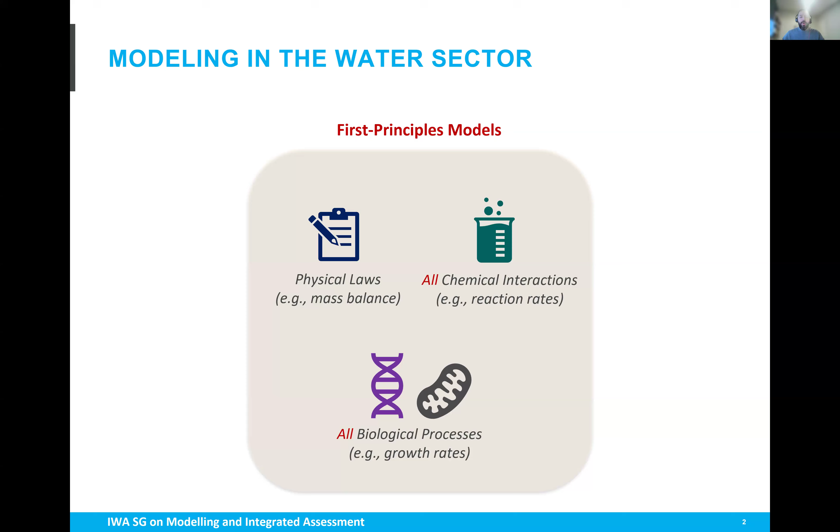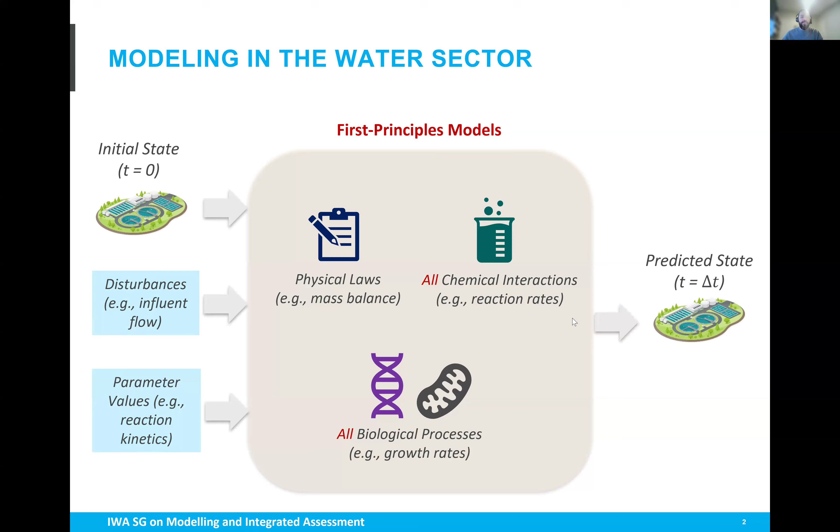That model takes the initial state of the system, the disturbances that affect the system, like the influent flow if we're talking about a treatment plant, and the parameter values, like the reaction kinetics, and gives us the predicted system state at another time. That's how we used to do modeling, we're still doing it, and likely we will continue doing it.

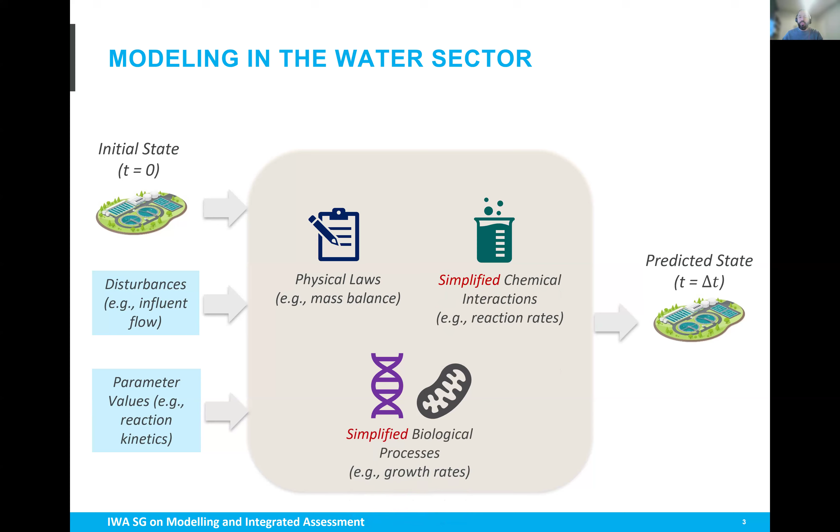A little tweak on that is when we try to simplify these processes. We don't throw in everything we know about the system; chemical reactions and biological processes are lumped or simplified. Now we're talking about semi-empirical models, and an example is a mechanistic model such as the ASM models in wastewater that almost every wastewater engineer is using, maybe on a daily basis.

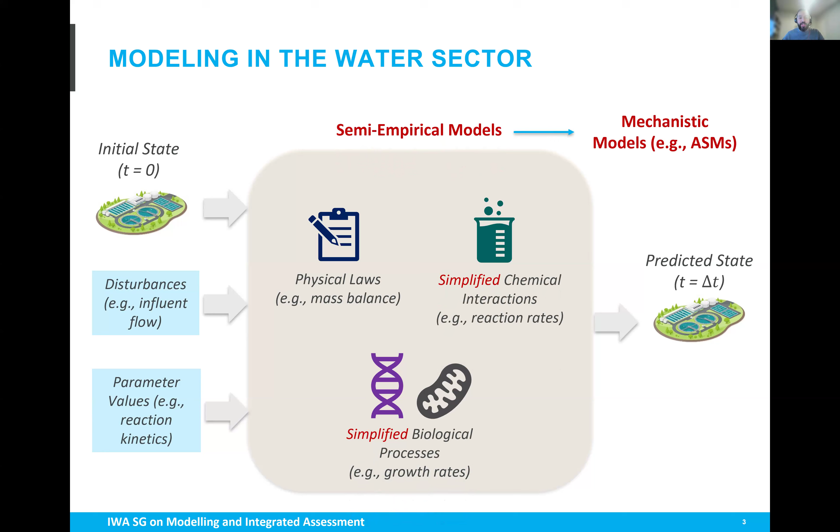These mechanistic models have been the gold standard in our field. They try to model a cause and effect relationship, so that's why we love working with them, because they match our causal mind. We prefer causal relationships over statistical relationships because they allow us to answer what-if or hypothetical questions, or make an intervention, seeing the actual case of the plant or the system.

But what if we changed that factor? What's going to happen in the system? Because these models are mainly based on causal relationships, they allow us to do so with reasonable confidence. That means they also work outside of the calibration range. Conceptually, you could extrapolate these models.

You may have less confidence because you didn't calibrate the parameters in another operational range, but you still have conceptual confidence because you're modeling the same relationship. So you likely know the trend might be right, and that when you extrapolate, things will work out. But this confidence is conditional because it assumes that you understand all the relationships in the system.

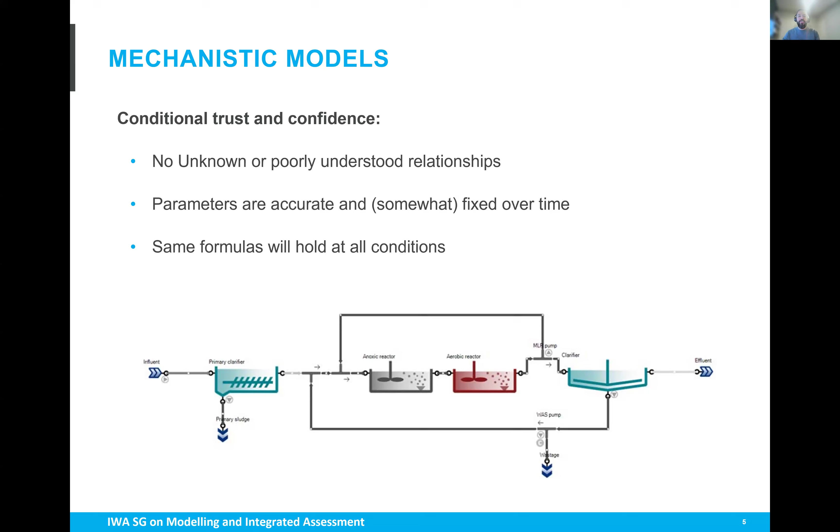You don't think that the Monod equation, for example, will change, or that another term should be added. And the modeling software and versions are being improved day by day by adding switch functions and inhibition functions that activate at certain conditions to make sure the same formula will hold all the time.

But actually, when you try to think, why do we build these models? Sometimes we may face some challenges. Do the mechanistic models fit everything that we need to do? So look at things from a bigger systems-thinking perspective.

You're going to see that we have some inputs which are a function of time, a system state, which is a result of the input and also a function of time, and the same for the output. So if you think about the inputs at time t, which is the present, and you'd like to model the input and understand more about it, that's kind of an influent generation problem. If you'd like to understand more about the system state, that turns into a monitoring and understanding problem. And if you would like to model the output or predict the output, that could help you in planning and decision support.

But if you think about the future, if you want to understand how things go in the future, sorry. So when you think about the future, if you would like to forecast the inputs, that will help you do some resource planning. For example, if you can forecast what influent is being generated in the next few days, that will allow you to do some resource planning. For example, shut down some reactors, or maybe you need some extra operators working on site.

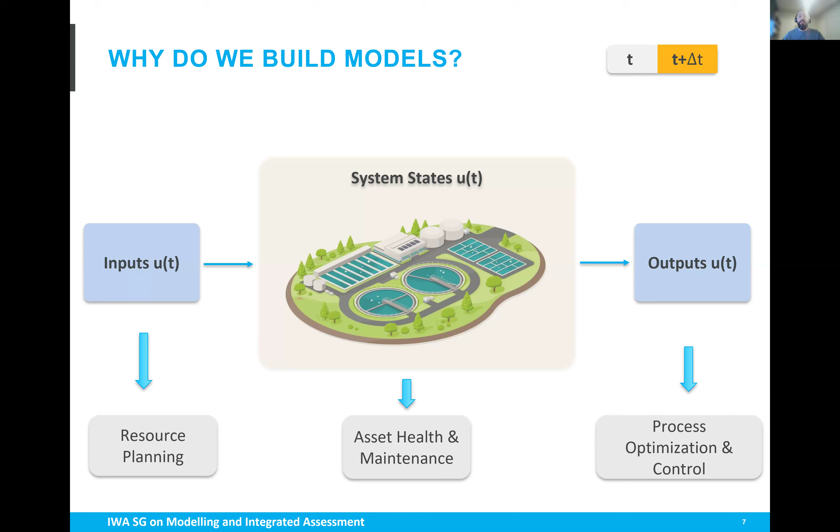And the same for the system state. If you can forecast what's going to happen to the system state, given the changes that you expect in the input, that will allow you to do some asset health and maintenance. And for the outputs, that will allow you to do some process optimization and control. So things don't fall in the same box with one model, as if you only want to do monitoring and understanding of a system and have only a single objective. There are different evolving objectives, and probably not the same type of model will work for everything.

So thinking about these objectives and putting them into boxes, we have process monitoring and understanding, asset health and maintenance, forecasting, process optimization and control, and planning and decision support. But not every part of this can be done using the same type of models. For example, can you do forecasting using the same mechanistic models? Well, there are some trials to do forecasting using them, but they require a massive amount of data, and they are not giving the results that everyone aims for.

But if we think about things the other way, with the huge amount of data being generated every day and the evolving computational power, now everyone is talking about artificial intelligence, but how do we benefit from that in our field, the water sector? A little introduction about what artificial intelligence is and what machine learning is. Artificial intelligence is mimicking how humans do intelligent tasks. Humans, for example, can talk and understand language. So now we have natural language processing and capabilities such as ChatGPT, which everyone is interacting with maybe on a daily basis right now.

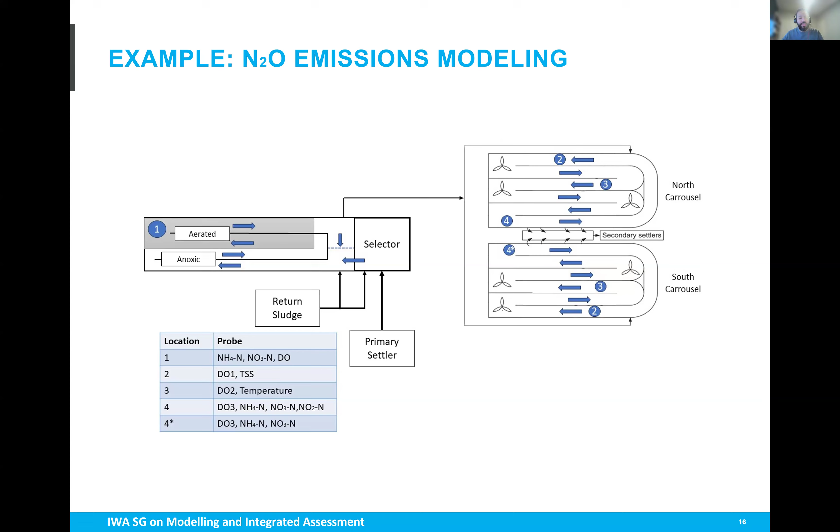So I will talk about two examples here. The first one is about N2O emissions modeling, and you can see more details in the publication that I'm going to share. That was a system where we were trying to model N2O emissions. For your background, mechanistic models have always struggled to capture or predict N2O emissions accurately. I will not talk further about the details, I've talked about it in several other conferences, but it's simply these input features being used in a machine learning model to predict the N2O emissions. And the results were already good in terms of prediction.

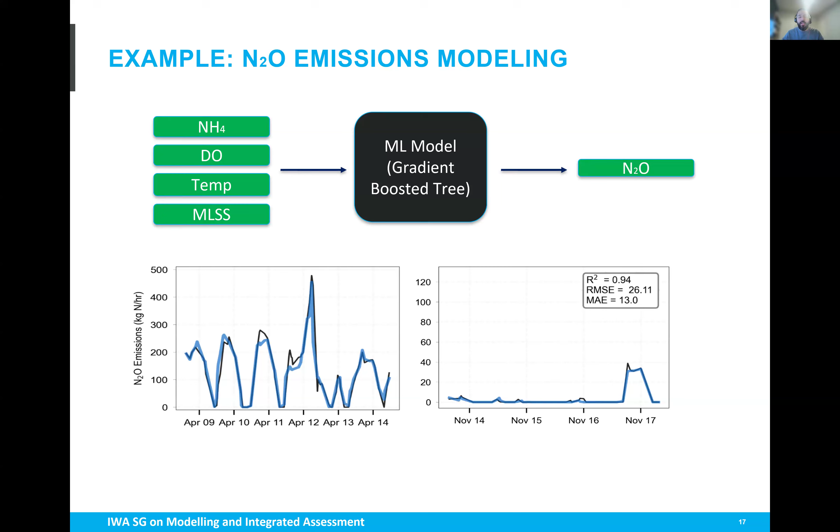So the message I would like to convey is that with data-driven models, you probably don't have to worry about accuracy anymore. With this powerful function approximator, with reasonable effort and reasonable data quality, you can generate whatever accuracy you're aiming for, probably. But there are other challenges to worry about. So, do we align with domain knowledge? Assuming that we already made the prediction, can we use these predictions for decision making?

Okay, now we see the prediction, we see what factors have made this N2O high. Can we rely on the model to go and modify one of these variables, one of these parameters, to reduce the N2O emissions or not?

But before we go that way, is the prediction aligned with domain knowledge? Because a model can be doing the right prediction, but for the wrong reason. Remember, you just trained this model on only one data set. So it could be just making some spurious relationships or spurious correlations.

So what we did here is that we tried to see the alignment of the model with the domain knowledge by trying to mimic and model the relationship between, for example, one parameter like the nitrite and the predicted variable. And we have two versions. One is a complex model and one is a simplified one.

And we found that for the complex model, the relationship was really shaky. When you increase the nitrite even by a very small amount, you could go from an increasing value of N2O to suddenly dropping or decreasing, and it's not a stable relationship.

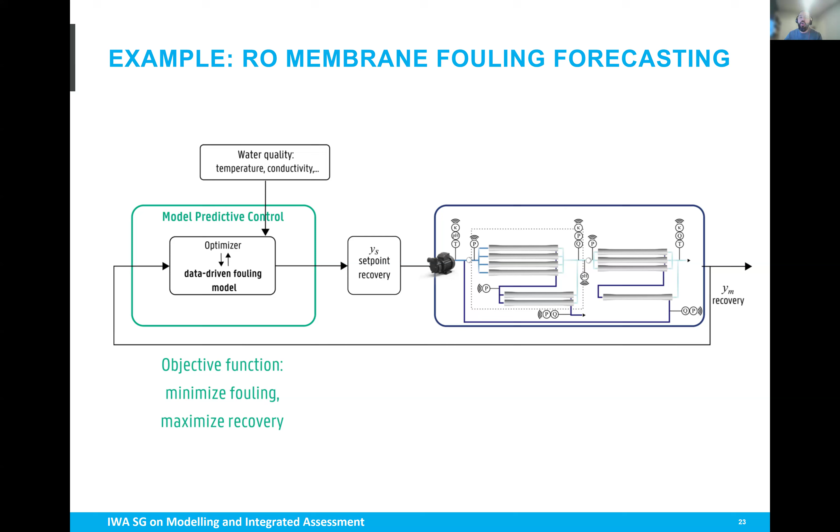Another quick example is about RO membrane fouling forecasting, and that work was done with modelEAU. The idea here was using data-driven modeling to predict or forecast the fouling of an RO membrane so that it's used as part of an MPC. Because mechanistic models that try to forecast membrane fouling are really heavy or not reliable to really make the forecasting or the prediction that you want.

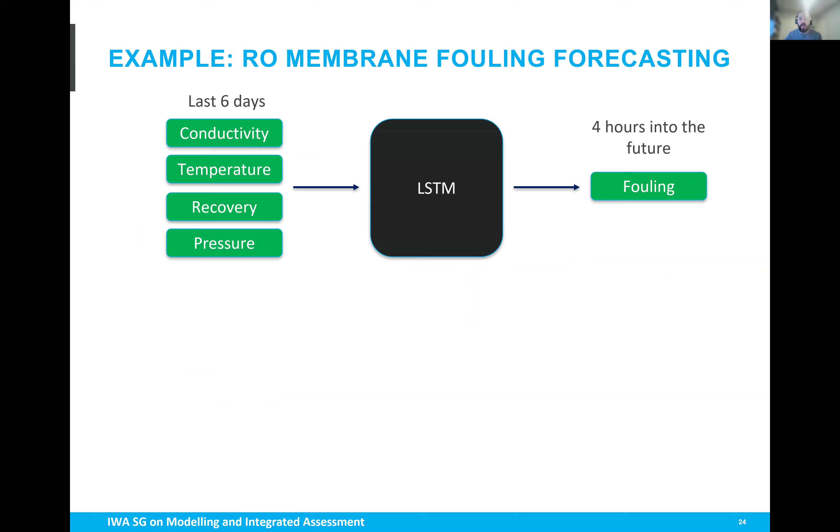And then same here, an LSTM model was used. It takes the last 6 days of these parameters and it tries to predict the fouling 4 hours into the future. And then if you look at this forecasting, it really looks good. This is almost how we try to evaluate our machine learning model in addition to metrics. You see that the forecasting looks really good.

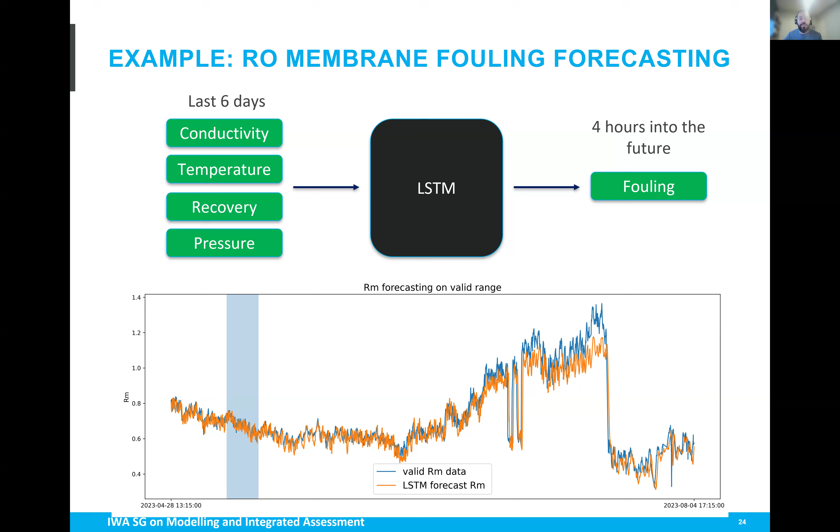But if you try to zoom on a period, even like this period that looks really good, you're going to see that you're actually missing the point of what you want to do. You would like to be able to forecast the trend or make an actual decision, because of how the fouling is going to change in the next few hours. But what's happening here is that there is a huge lag, maybe in terms of hours, between the actual forecasting and the actual data, which is giving you completely the wrong trend.

The reason for this is that the system is being turned off and on very frequently, and the data is very hard to interpret. It's very hard to find some meaningful relationship using the sensors when it's being turned off every few hours or maybe every 2 hours. So that was a problem. And if you really got into the illusion that it's just about some simple accuracy metrics, you will likely miss the purpose of why you're developing this model.

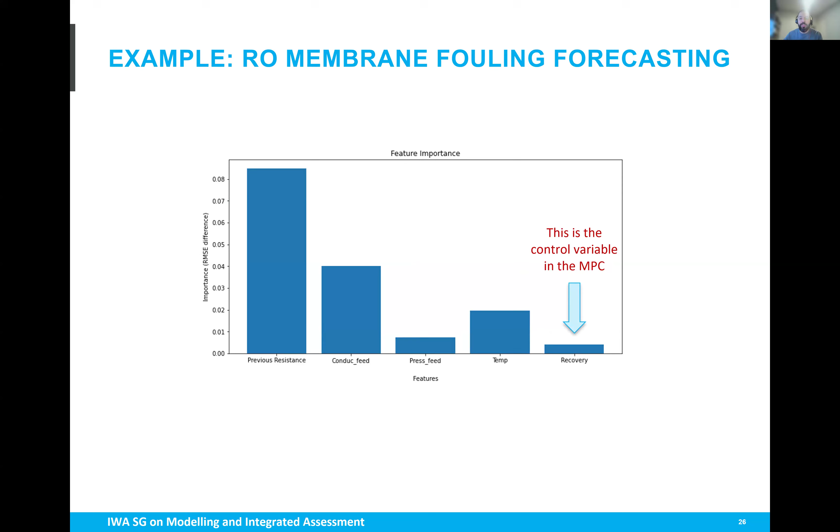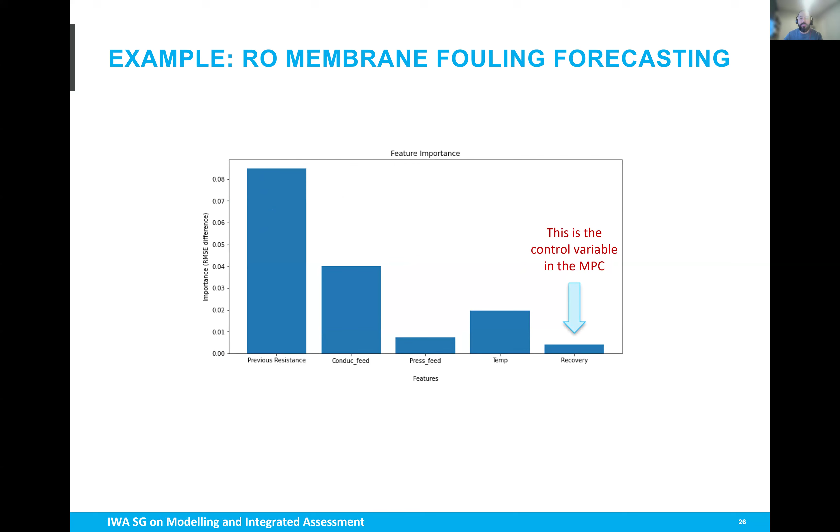And even further, that model should be reacting to recovery. But the model relies on spurious relationships. That's the feature importance of the features impacting the model, and the recovery is the one that is going to be used in an MPC setting. But you see that the model is relying on the previous resistance, which is the autoregressive relationship, instead of this recovery. And the way that was fixed is by reconstructing the membrane fouling, by predicting the difference, the delta RM, instead of RM.

And predicting that delta RM made the model able to capture the dynamics to a really great and better extent. That's because it turned the data into stationary data instead of highly non-stationary. It simplifies the problem even for a powerful machine learning model to solve. And that was reconstructed back, so you end up forecasting the absolute value of the membrane fouling.

So it is worth noting that even for a powerful model, the operational conditions and characteristics affect how the model works. They made the predictions lagged, and switching to forecasting the delta RM made the problem a lot simpler and easier to forecast, and led to better accuracy overall.

Some key takeaways about data-driven modeling: it's now part of our modeling toolbox. So don't think about this as replacing any of the other models; they solve certain types of problems. The other one is that just because they are very powerful doesn't mean you could just throw things in and get the output as a magical device.

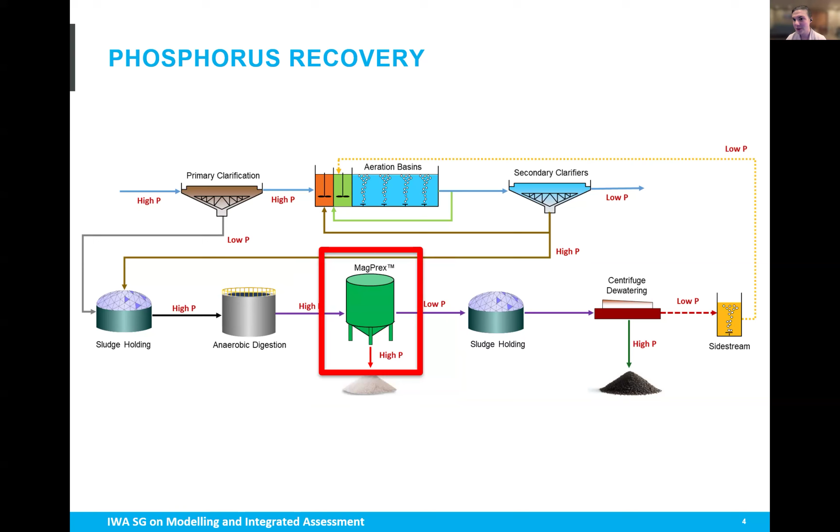And so what do you do? Right, you try to put in a controlled struvite precipitation reactor. And that's great because now you can generate a beneficial byproduct that can be sold as a fertilizer, and you reduce maintenance and you reduce truckloads. Everybody wins. But so here's an example of the struvite precipitation reactor, MagPrex.

It's a delicious matrix, as you can see, but you can also imagine not a lot of sensors can live in this matrix and give us accurate data. So to control this, we're adding a reagent, right? So mag chloride, and doing a pH adjustment using air stripping. So those are the two control levers that we have for the system.

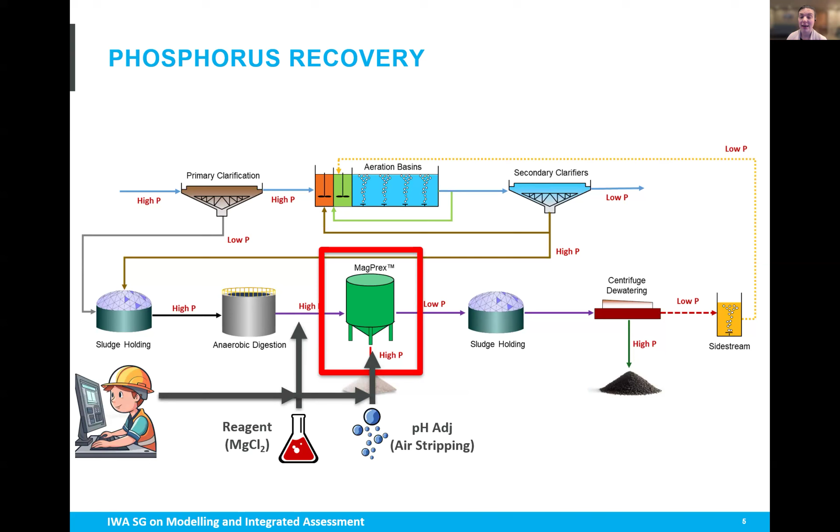And right now, operators are just kind of guesstimating. They go in, they take a sample 2 to 3 times a week of the effluent phosphorus, and they're able to target an ideal effluent phosphorus that doesn't affect the BioP and does not consume an excess of reagent adding. And that's about 30 milligrams per liter for Metro.

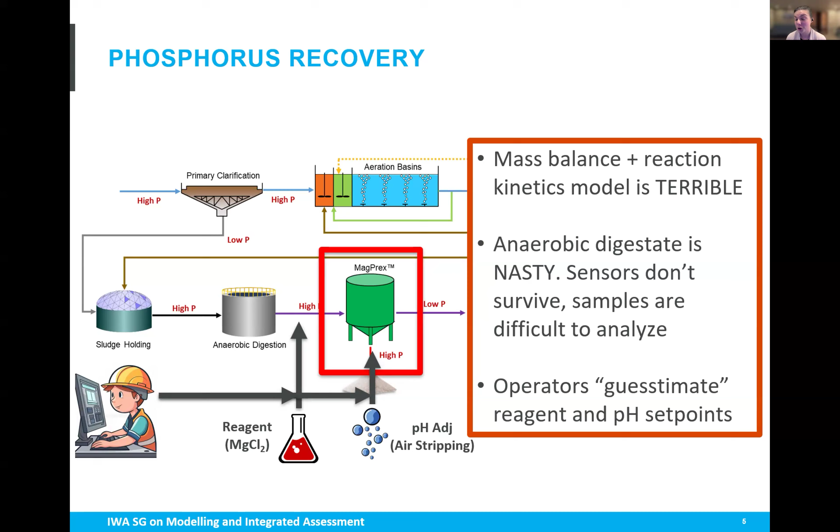So why don't we have more advanced controls here? The only mechanistic model that we have is just a very generic mass balance and chemical kinetics model. And it's terrible at predicting. We don't have a lot of online data, right, as you saw. And so you're very much reliant on this operator specific, site specific knowledge to try to optimize or tune in this model. Hence why you can see how machine learning is now potentially an avenue to better optimize the system.

So kind of revisiting where we're here. I hear this a lot when I work with utilities. Oh, I have so much data. Well, that might be true if you're using instrumentation data, but as soon as you get to using laboratory data, you suddenly have to condense down your data space significantly, which means you may not have as much data for training as you thought you did.

So when we start asking these questions of, can I apply these standard data science principles, so what we learned from computer scientists and statisticians in the machine learning space, to environmental data sets, we now have to think about data sparsity, distributions, things that we as practitioners know intuitively, but I think we see machine learning and maybe get a little scared and don't trust our intuition. So I want to encourage everyone to be a machine learning practitioner and trust your instincts as you go through the process.

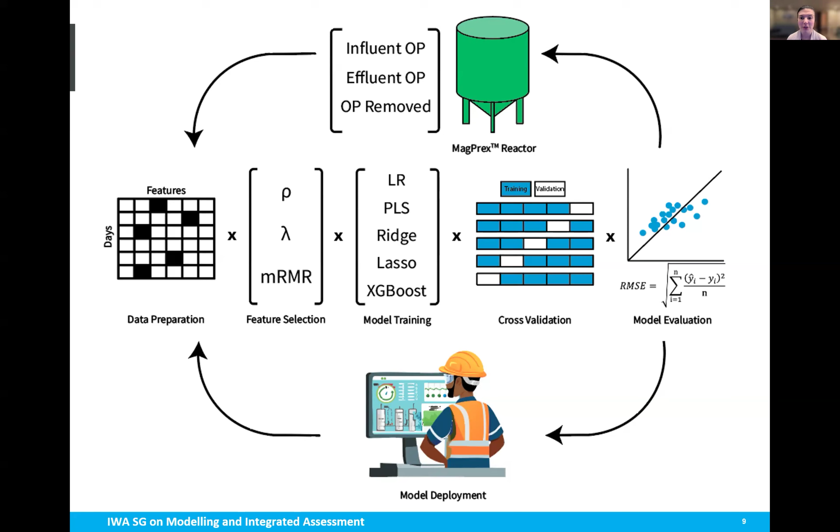Obviously trying a spectrum of different model complexities because we don't know, right? There is no universal model. Doing a robust, sensitive to the data set cross-validation and model evaluation, and then deploying the model and understanding how it deploys in real time. So now moving on to the three different models and evaluating the results.

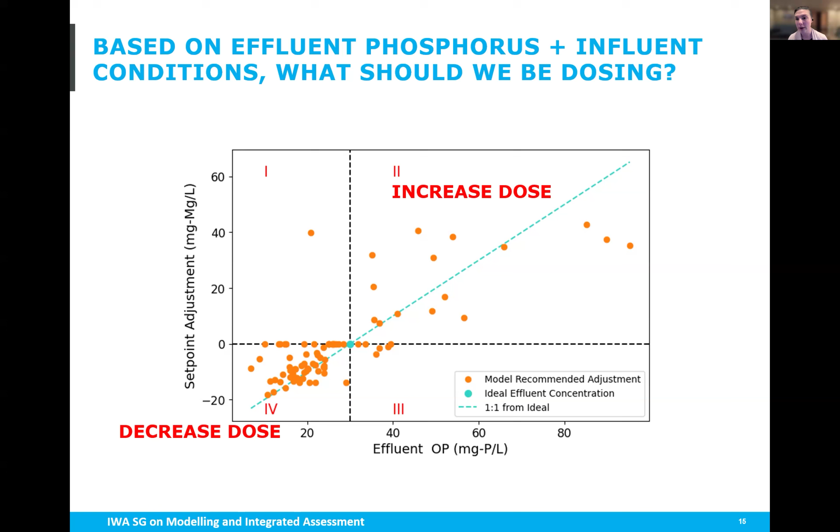And so from a feasibility standpoint, that's why we decided to actually move towards a classification-based approach. So even though we're still using a regression model to derive our original response to operations, if we look at this through a classification lens, so just does my data point lie within one of these quadrants, our accuracy actually becomes pretty incredible. So we end up being correct in as far as the direction that we want the model to go 97% of the time.

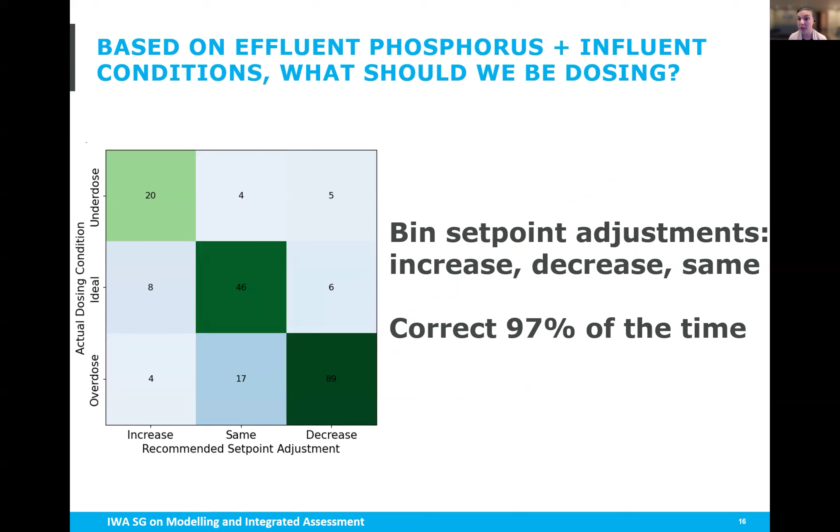When we think about practical implications, the operators are always going to be making the determination of how much they're willing to adjust the mag chloride concentration by anyway. So this is a great middle ground that meets our objective, that is sound statistical science. And so it's pretty awesome to see. But when we do the calculation for how much we actually save, it's actually not that much, maybe 5%, because, right, operators had already kind of tuned in this model pretty well.

And so it's interesting when you try to consider the business case behind some of these projects that I work on, because a lot of times the business case is not in energy savings, but the business case is in an increased resiliency, an increased robustness, and improved operator response time. And that can be difficult to sell from a business, from a capitalistic standpoint, but it's incredibly important when we think about longer term changes and being able to respond to climate change or population dynamics or other potential future challenges that utilities are seeing.

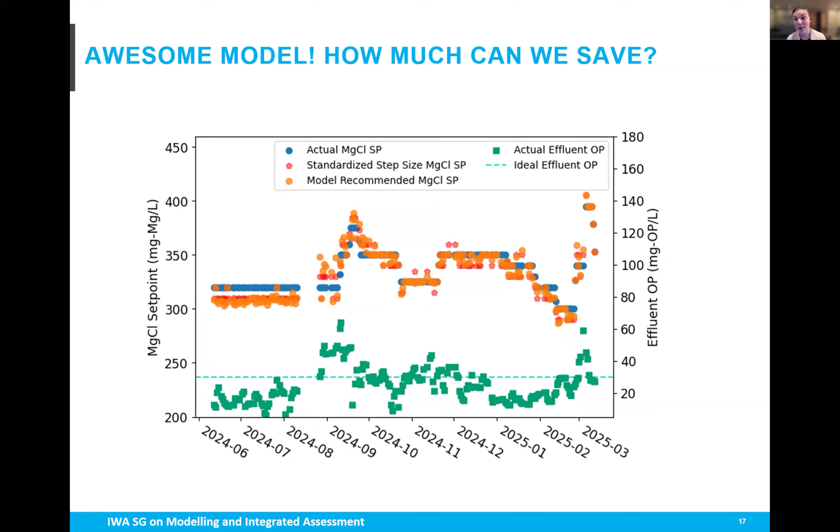So despite a multi-year sampling campaign that Metro was not willing to continue to invest in beyond the research scope of the project, because there was hope that this would help augment some of the sampling requirements, we still just did not get enough data.

So the answer is, we'll just get more data. That's not an option. So you have to really think about, when you're working on a problem, what's my overarching problem? And put on that experimentalist hat and try a lot of different ways to try to achieve that objective, given the deployment conditions that you're going to see in the real world, because you'll find some incredibly interesting things

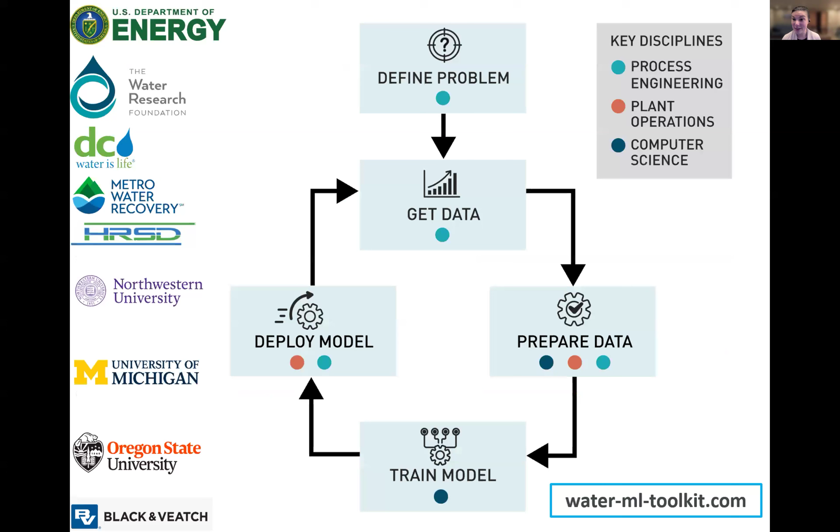So big research question coming down the line. How do you build these data-driven models in data sparse spaces? So we've now kind of completed the whole cycle, right? The model is still running. We're still collecting data. It's still an advisory tool, but we know that it can be better. So hopefully you've learned that machine learning models are great in capturing that non-ideal, highly nonlinear behavior. But as much as data are your solution, they can also be your problem.

And so you always have to be very wary of artificially low errors or very, very high accuracy to ensure that there isn't a data leakage problem where maybe some of your training information has leaked into your testing set. I see this a lot when you have to interpolate data or when you have very high frequency time series data, or if you don't sufficiently lag laboratory data, right? Because they might take a sample, they will get it 24 hours later, but they'll still mark it in their system as received on day one. And so understanding some of those dynamics can drastically affect what your final calculated errors are before deployment.

And so, with all of those things in mind, even though it seems scary, when you look at it as a team effort, when you look at it as let's include all of the users of our model, and you look at this as we will figure it out, those are the most successful utilities that I've seen and the most interesting projects. And we discover a lot of new things about environmental data science that way.

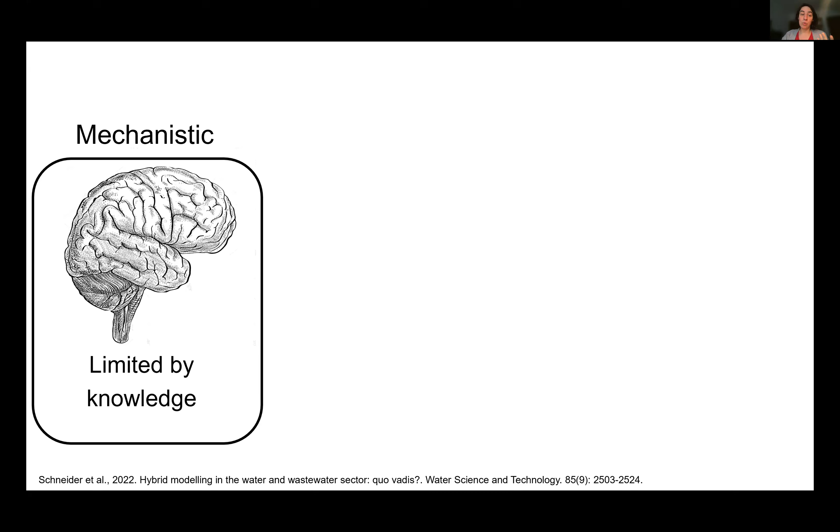Okay. So as Mostafa introduced, historically we've been mostly using mechanistic models based on first principles, which are either fully based on first principles or including some empirical equations in there. But many of those are maybe limited by knowledge, have too many simplifications, don't have all the relevant processes in there. So we see that they don't always give good results. Of course, alternatively, we have data-driven models, which are completely based on data and will learn their model structure from the data. Of course, these are limited by the data themselves and struggle with things like extrapolation and interpretability.

So over recent years, there's also been research into ways to combine these two paradigms, to make use of the advantages of both, the robustness and the interpretability and the process knowledge in the mechanistic models with the flexibility and the ability to learn from data in the data-driven models. And that leads us to what we've been calling hybrid models. So hybrid models, a way to combine mechanistic and data-driven models together to take advantage of both paradigms.

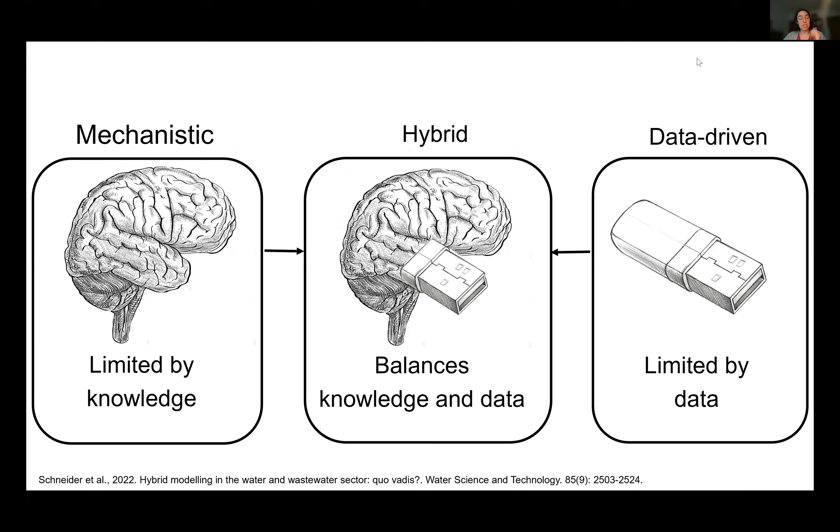But hybrid models is only one way to incorporate more domain knowledge into machine learning or data-driven models. What I would like to do in today's presentation as well is to zoom out a little bit and to talk about scientific machine learning, it's called, so SciML, which is a bit of a bigger domain that incorporates hybrid modeling, but that goes beyond.

So what does scientific machine learning entail? The idea of scientific machine learning is indeed to incorporate domain knowledge and domain robustness into machine learning efforts. So to incorporate scientific computing, domain knowledge, science in general into machine learning, with the goal to achieve scalable, domain-aware, more interpretable machine learning. As I said, hybrid modeling is part of scientific machine learning, where we combine mechanistic and data-driven models in some way.

But it also includes surrogate modeling, for instance, where you use machine learning to train less complex or less computationally expensive models onto mechanistic models. Equation discovery, where we use data-driven techniques to learn interpretable equations from your data. There are physics-informed neural networks and so on. So many different methods are included in scientific machine learning. Hybrid modeling has gained a lot of maturity over the last years, but it's interesting to look at other methods that can incorporate more domain knowledge into your machine learning or data-driven models as well.

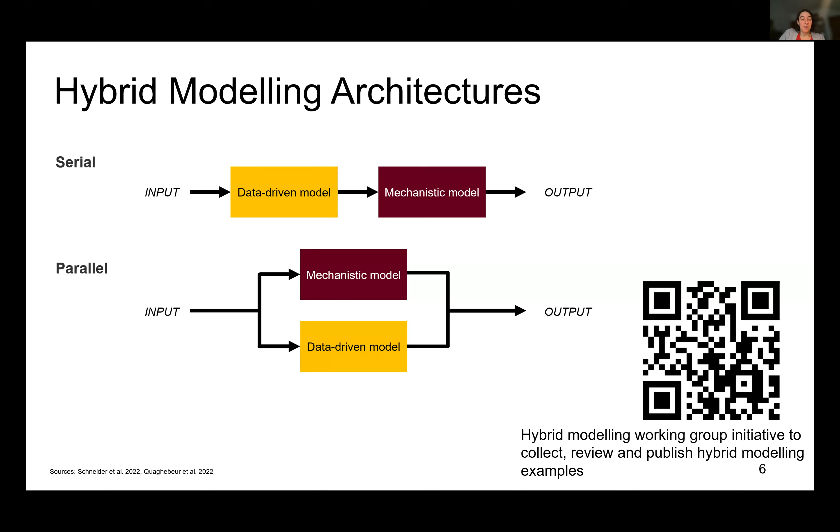So let's first look at parallel models. When would you use a parallel hybrid model? If you have incomplete knowledge in your mechanistic model or some oversimplifications, but you don't really know where in your mechanistic model. It's very difficult to pinpoint where exactly it is. So you will do kind of an overall compensation with your data-driven model for accuracy gains.

I will give a little example of work that was done at pilot wastewater treatment plants. So this is our pilEAUte, because EAU is water in French. The pilot water resource recovery facility at the Université Laval campus in Quebec. So it takes water from the student residence. It has a pumping station in the sewer network of the campus.

It goes to a storage tank, primary clarifier, and then it has a typical 2 anoxic basins, 3 aerated basins, an internal recycle, secondary settler, and a sludge recycle. So what we wanted to do is to build a hybrid model to better predict the nitrate concentrations in the effluent. So this was something that our mechanistic model was struggling with a bit. So we were looking into a hybrid model to do this.

So this was work done by Loes Verhagen. So what she did is, first we had a mechanistic model in WEST that took the traditional influent and predicted a certain concentration for the nitrate effluent. So we combined this with a neural network that was trained to predict the error on the nitrate concentration. So the remaining error between the mechanistic model and our actual pilot plant data. So we combine both, we sum them together, and we have a hybrid model for the nitrate effluent.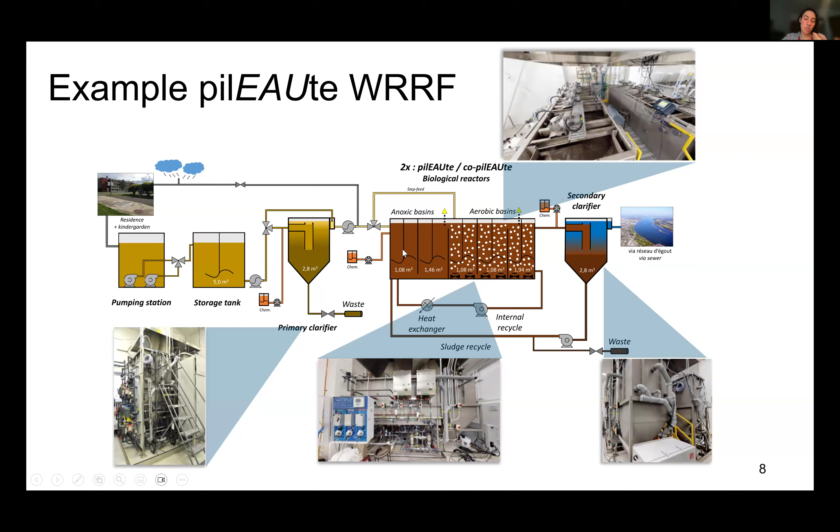And so this we are not looking at in parallel hybrid models. So you see, there's no feedback from the neural network model back to the mechanistic model, which means that we are not closing our mass balance. We're only just compensating for an error at the end.

Second challenge is balancing the calibration efforts. So you need to calibrate the mechanistic model and a data-driven model. But how much calibration effort do you put in both? In this case study, what we observed was if we build a hybrid model using only standard parameter values in the mechanistic model, we got better results of the final hybrid model than if we first tried to calibrate the mechanistic model.

So the idea is, if you over-calibrate your mechanistic model, if you overfit it to your training data, it will be more difficult to actually build a hybrid model, because the hybrid model doesn't only have to learn missing dynamics, it also has to learn the mistakes from the overfitting in your mechanistic model, which is not really easy to do. So this balancing of calibration efforts when you are combining 2 models is still a big challenge, for which I think at the moment no real methods or recommendations exist to figure this out.

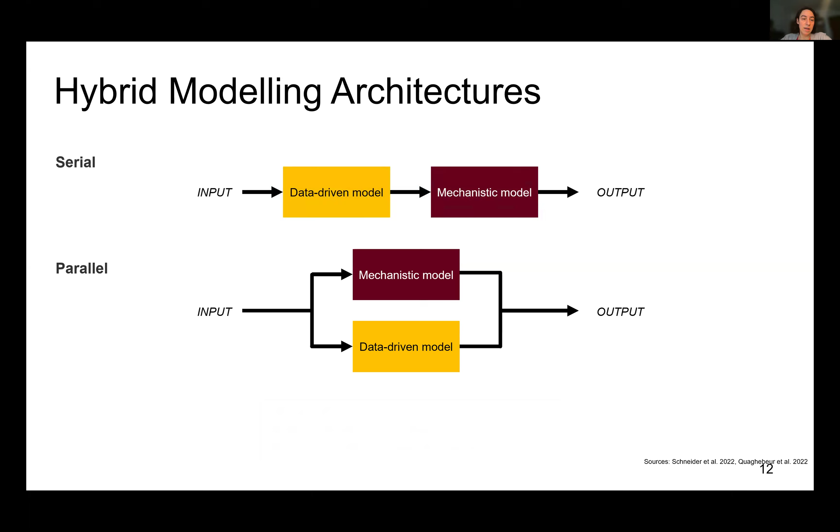Okay, let's look at serial hybrid models. So here we will have a data-driven model that feeds into a mechanistic model. When is this mainly interesting? If your overall mechanistic model structure holds, but you have a specific sub-process where you have high uncertainty or that you know is insufficiently defined, so you really want to focus your data-driven modeling effort on that specific sub-process.

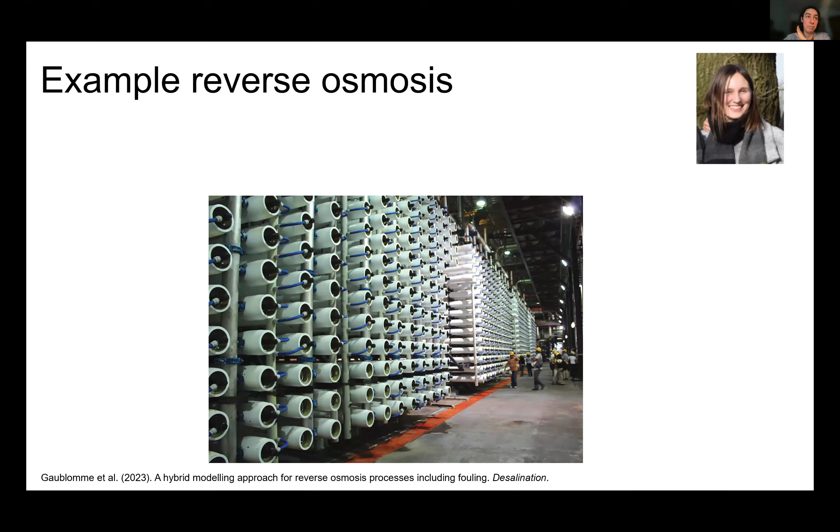I will give an example of a reverse osmosis case study, where we built a hybrid model to predict the concentrations, pressures, and flow in both the permeate and the concentrate of the RO installation. So we had a mechanistic model, a solution diffusion model, that had a lot of processes well described, like the osmotic pressure and the concentration polarization on the membranes. All of those were well described by the mechanistic model.

The only process that was not well described by the mechanistic model was the fouling of the membrane. And we could, from the sensor data that we had, calculate the membrane resistance. So we trained a data-driven model, in this case again an LSTM, a long short-term memory model, to predict this membrane resistance with inputs temperature, conductivity, flow rates, the recovery rates, calcium concentrations upstream, and the cleaning in place that was done on the membrane. So we built a data-driven model to predict this membrane resistance.

And then, of course, we had to find a way to couple this prediction of the data-driven model to our mechanistic model. What we did is we coupled it to 3 parameters from the mechanistic model that we know are fouling sensitive: the water permeability, the solute permeability, and the spacer thickness. And we created connections either from literature or through some simple empirical equations.

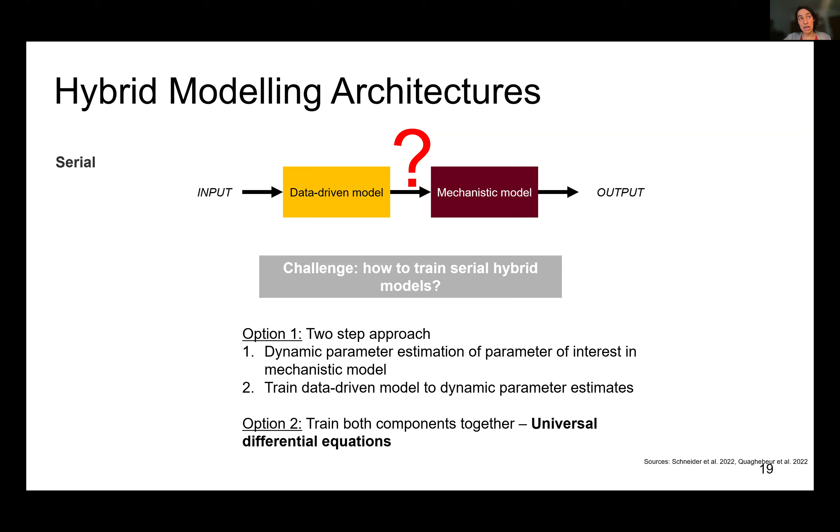Option 2 is to train both components together. So instead of trying to derive this intermediate variable, you just train both components together. Then we come into the area of universal differential equations, because in that case, of course, your data-driven model will be incorporated directly into your differential equation.

So this is what we call hybrid neural differential equations, another form of hybrid models, also called universal differential equations. So where indeed you have your differential equation, you have some mechanistic component, say Monod kinetics, and you add a data-driven component in there. You can sum both up, but you could also, for instance, just replace an uncertain parameter, for instance your mu, with a neural network. So you can do this in both a more parallel configuration or a serial configuration.

But for both, the interesting thing is that your data-driven component is directly within your differential equation, which comes with some significant advantages related to the fact that you can do continuous time modeling instead of discrete as in neural networks. Since you train everything through your ODE solver, it's very well able to handle irregular data. For instance, if you have sensor data combined with lab data, because you don't have a fixed time step, you can handle both. And because you actually learn dynamics instead of absolute values, your data-driven component becomes more interpretable.

Of course, the big challenge is training, because you need to do your training through backpropagation of your neural network, but that backpropagation needs to be done through an ODE solver at each iteration, which makes it computationally not so interesting. Several methods are available or being developed to tackle this a bit, but it stays a bit of a difficult training process. So to come back to the RO case, the little black line that was undefined earlier was modeled with a hybrid neural ODE.

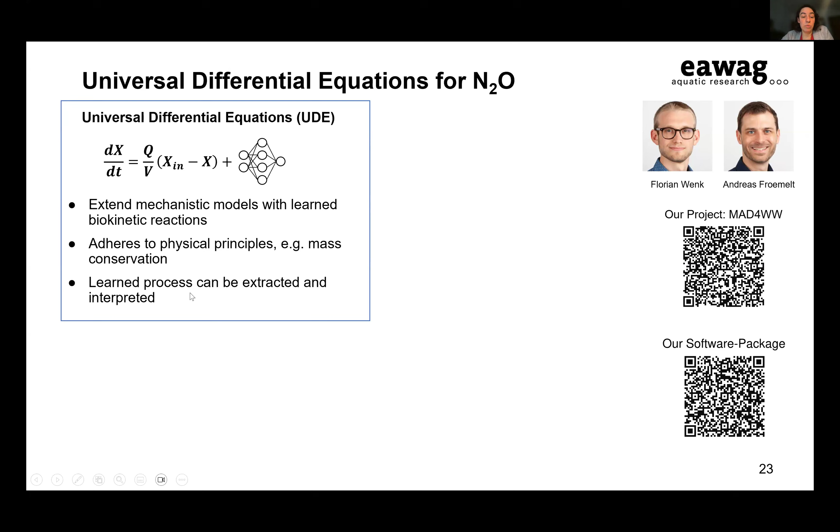I have another example here of some very nice recent work that has not been published yet, from the group at Eawag, the group of Andy Froemelt with PhD student Florian Wenk. They have been working on this idea of universal differential equations to see how we can optimize N2O predictions. And like I said before, the nice thing with universal differential equations is that they do include mass conservation, and that the learned process can be extracted and interpreted because they learn the dynamics.

But for the third branch, scientific model discovery, I do want to talk about this a little bit and give some examples. So the first one is about surrogate modeling. The idea of a surrogate model is that you have a very complex model, which is maybe computationally too heavy for certain applications, and you train a simpler data-driven model onto this that should, in theory, retain all the crucial elements of the complex model. So this is work done by Juan Pablo Gallo.

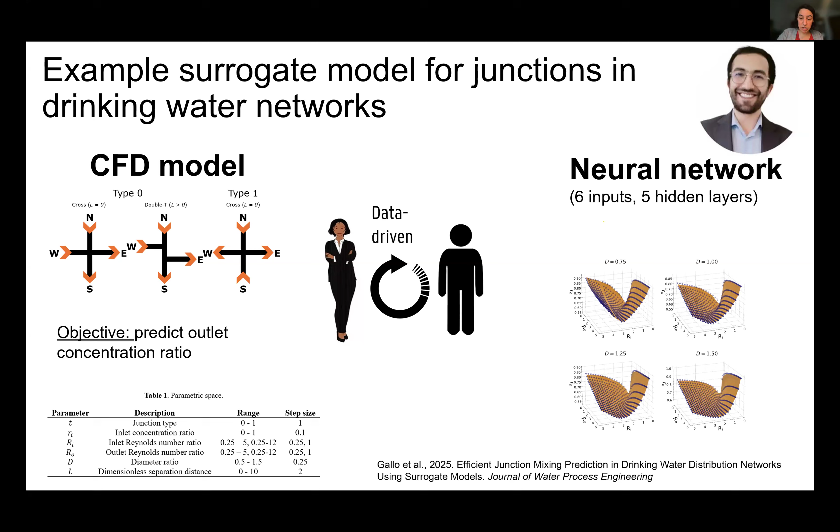In total, I think there were about 100,000 scenarios that were done. And then a neural network was trained on this CFD model. The advantage of this neural network is that it could then be integrated into existing drinking water network models like EPANET. And this is an example of a result from EPANET, where you can see here in color the pipe

connections where there was a big difference between the EPANET simulations considering complete mixing and the simulation performed with a surrogate model. So you can see that there's a section here that is quite sensitive to these mixing dynamics, and that there was up to 50% difference with the case where ideal mixing was considered.

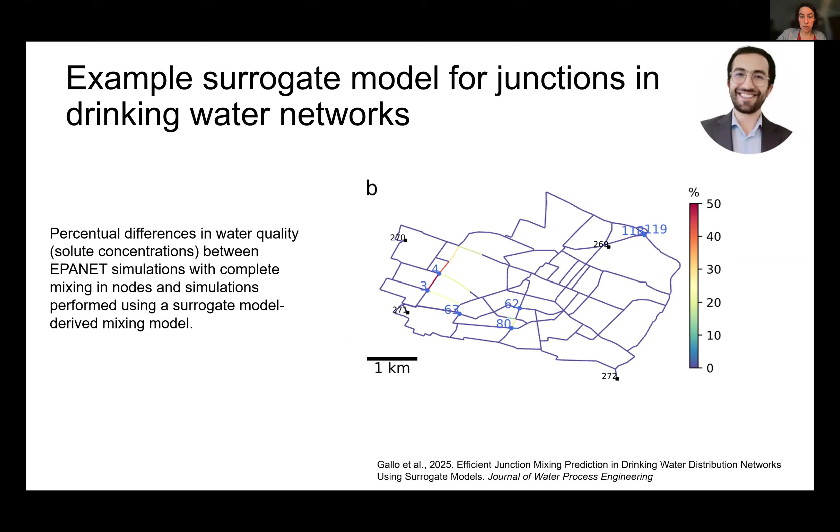The last thing I want to talk about is equation discovery. We've worked on this a very little bit. One of the advantages of hybrid modeling, specifically of serial hybrid models and universal differential equations, is that you have this neural network that you can actually go and analyze afterwards and see what it learned, what it compensated for in your mechanistic model.

So the idea is that you create a mechanistic model, you add a neural component, and you train your hybrid model. So then you have this kind of form. But then, of course, this neural network you can actually go and analyze. This we've done with Shapley values. And then you can analyze what you learned from these Shapley values. So you can see from this Shapley analysis what your neural network learned, how much each of these variables contributes to the output of your neural network.

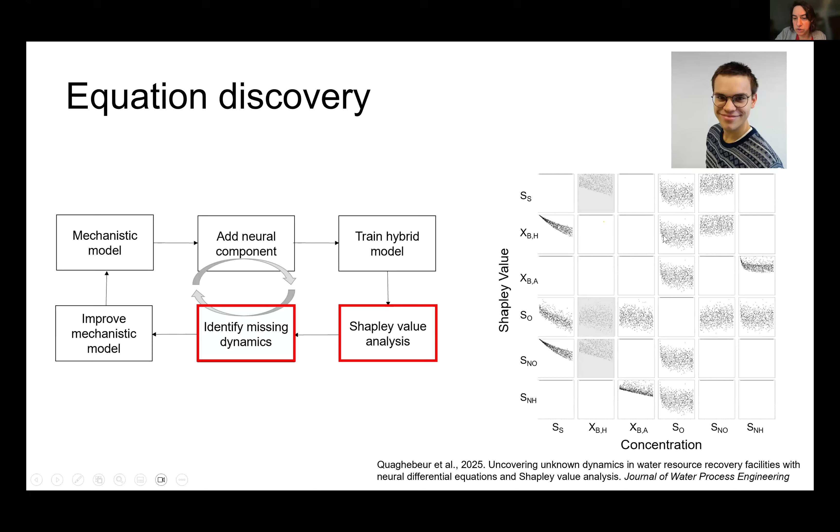And you can see that you can derive some dynamics. You can see, for instance, some exponential kind of functions. You could see some linear functions. So from this, you can learn and see which dynamics seem to be very obvious. For instance, here, some kind of linear equation between the nitrate concentration and the heterotrophs. So you can try to add this linear equation to your mechanistic model and rerun, so identify missing dynamics, and then restart the whole process.

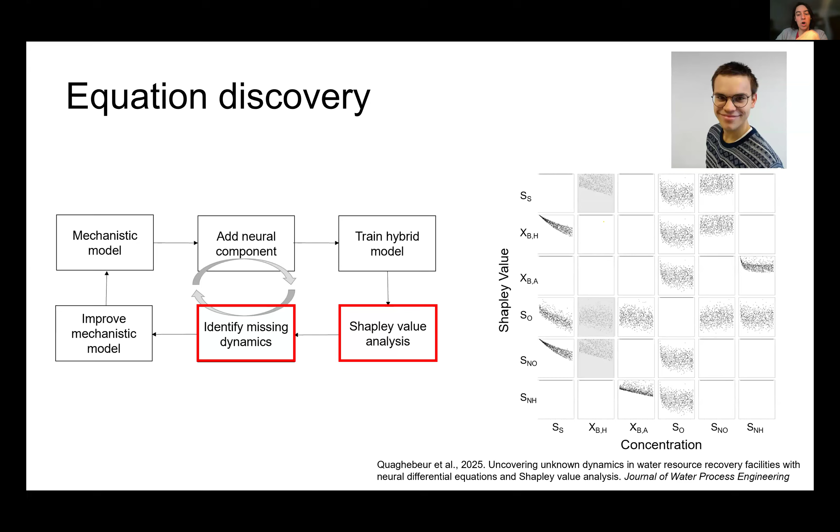So you again train a hybrid model, but now with a little improvement in your mechanistic model, you again do the Shapley value analysis and you again analyze it. It worked well in the sense that we could discover a lot of the missing dynamics, but of course it's a very time-consuming and very iterative process. It takes a lot of expert knowledge as well to be able to interpret these Shapley values.

So it would be nice if we could somehow automate this and automatically do equation discovery from our neural networks in the hybrid differential equations. There are quite some methods for this that exist. I think there's a very nice paper from Song et al. on data-driven discovery of governing equations in geosciences. So there's some sparse regression, some genetic programming. I only took a few, where the idea is indeed to try to train different types of data-driven models.

So in this case, for instance, a sparse regression on your data-driven component, to really try and see which empirical or physics-based interpretable equations can I fit on these data. So you would have some candidate models, and then you see through a regression which of these candidate models, for instance a linear or a quadratic equation, is relevant for my data.

I think this is a topic that is still underexplored, but it is very valuable for the future of this integration of machine learning into existing models, or to deploy them in practice, also to really work on the interpretability and to learn from our models and not just apply them to a certain case.

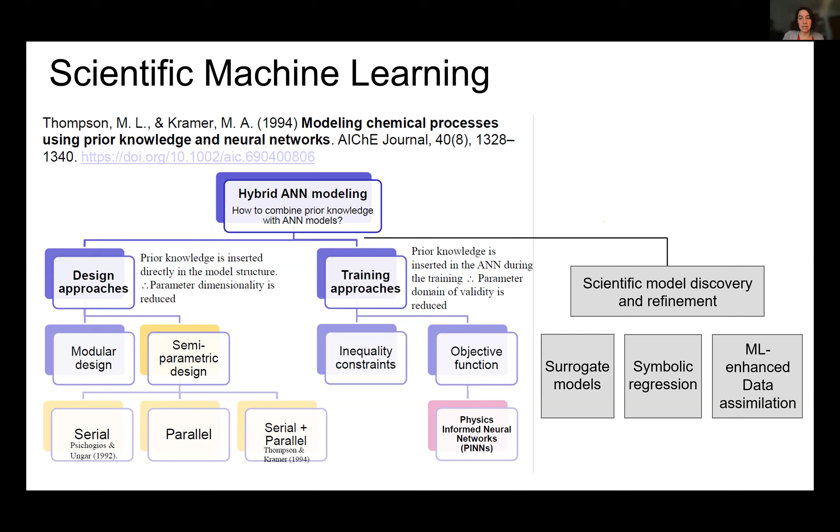And I think there's one big overarching challenge to this, which is model selection. It's how to decide which kind of model or which kind of methods to use to incorporate your domain knowledge. Will you go for a hybrid model or not? What kind of architecture in the hybrid model? So I think guidelines on model selection are really needed. And there's been a first initiative now launched from the hybrid modeling working group, together with the good modeling practice working group, to start working a bit on these guidelines. Thank you.